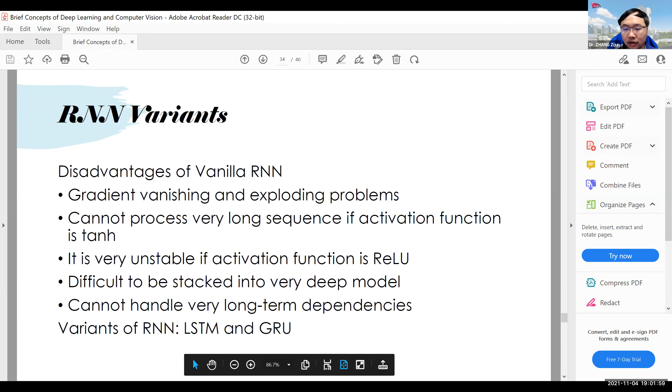I remember last time we probably stopped at transfer learning, right? The introduction to transfer learning. Okay, let's continue on today's lecture. So we were basically finishing this introduction part.

All right, so next let's talk about a very interesting topic, which is transfer learning. This is a technique developed not for improving the development of deep learning models, but it is a technique introduced for addressing the computational burden in developing a deep model for a problem.

So the main motivation of studying such a concept is that people find out every time when we want to utilize a deep neural network to solve a problem or deal with an application, we train the deep neural network from scratch, that means from zero, every time. This is actually troublesome. It's very time consuming and wastes efforts.

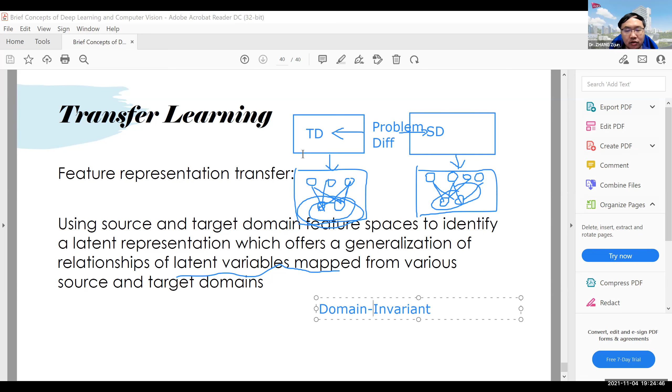Or in another way, assume that you are training deep networks for different domain problems. But you will have one hidden layer that is domain invariant, which can be utilized across different domains, okay? And such kind of feature representation from the beginning input to the latent features, they are able to be transferred. All right, so this is a very basic idea of doing transfer learning.

So there are different ways of doing transfer learning. We can just do instance-based transfer, meaning we're just fine-tuning the structure of a developed backbone model based on the target dataset. Or we can select some of the architecture from a whole architecture to be transferred, okay, that means it's kind of pruning some of the tree and replacing that kind of tree in other tree model. Remember, when we talk about the tree model, we talk about replacing some of the structure in the tree with some frequently used ones.

And the last one is called feature representation transfer, which means we can develop one latent layer which is domain invariant, okay, and such domain invariant latent features can be utilized as an input to developing further machine learning models for different tasks. So that's transfer learning.

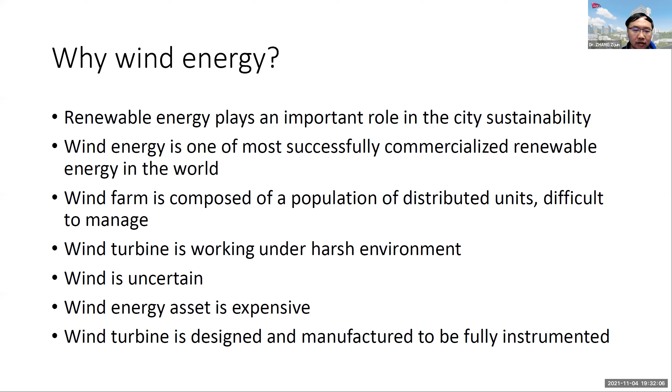It has some very big components like wind turbine blades. This blade could be like 50 meters or even longer, depending on the capacity of the turbine. And the rotor is also very big.

And inside, the big guys include one, the brake to slow down, to introduce torque to slow down the rotation of the wind turbine rotor, and the gearbox.

So what is the function of this gearbox? Why do we need to have a gearbox here? If you look at these big blades and rotor, when wind blows over here, it rotates, but with relatively a lower speed. But this lower speed is generated with a big mass, so it has a lot of energy. So we need to use a low speed gear to drive another smaller but high speed gear.

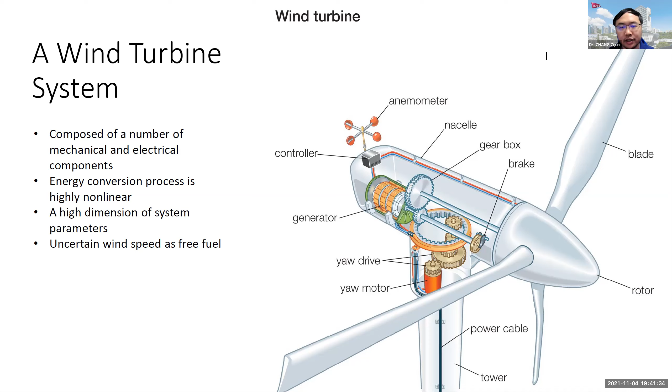To manage such kind of distributed big machines, we cannot just do our traditional practice of management where we visit the area of the machine, check its conditions, and see whether we need to do any maintenance. There will be more than 100 wind turbines in a wind farm, distributed across a very wide, broad area. Even if you drive a car to visit turbines one by one, finishing a whole wind farm would probably take a whole day without any checking.

So what we need to do is install an IoT system to collect data from those distributed systems. This kind of system is called a supervisory control and data acquisition system, or sometimes we call it a SCADA system. This SCADA system was originally designed for monitoring wind turbine conditions.

Meanwhile, it collects a massive volume of wind turbine data. Originally, what people pursued was collecting data of many dimensions and setting some thresholds. If those thresholds are crossed over by some signal, then we receive alarms, and we need to take action to do maintenance or checking.

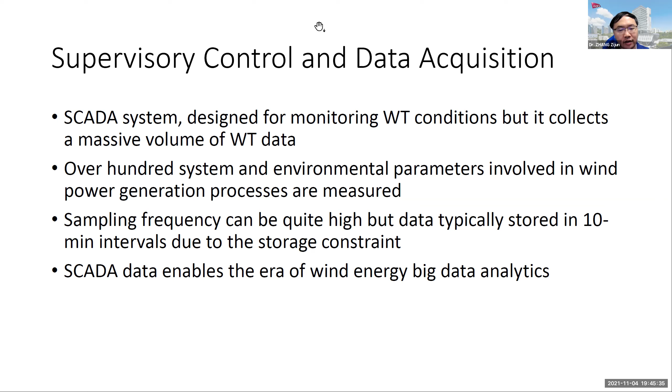And such collected SCADA data actually enables the era of wind energy big data analytics.

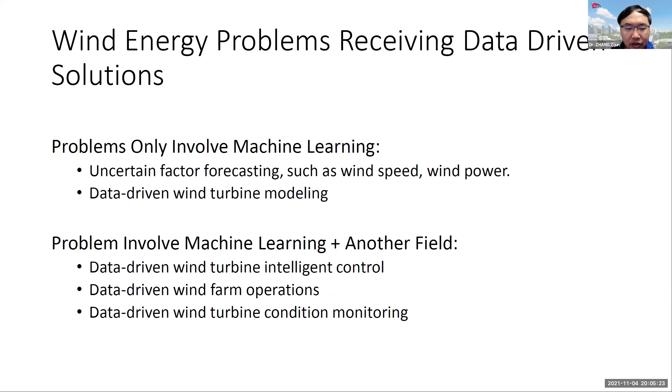Actually, these problems to be solved from the data-driven aspect fall into two groups. The first group is related to problems only involving machine learning techniques, for example uncertain factor forecasting such as wind speed and wind power, and the second is data-driven wind turbine modeling. The second group is a bit beyond so-called machine learning; it's machine learning plus another field technology. For example, machine learning plus control relates to data-driven wind turbine intelligent control, machine learning plus scheduling gives data-driven wind farm operations, and machine learning with condition monitoring techniques gives data-driven wind turbine condition monitoring.

First, let's look at the wind energy machine learning group of problems: the wind speed power prediction problem, as well as the wind turbine system model.

So a data-driven modeling process should actually consider physics-based and mechanical principles. It is needed that we incorporate domain knowledge into further studying the data-driven modeling. At least from domain knowledge, we will know which factors related to such a process should be considered as inputs, and which are the outputs generated by the process.

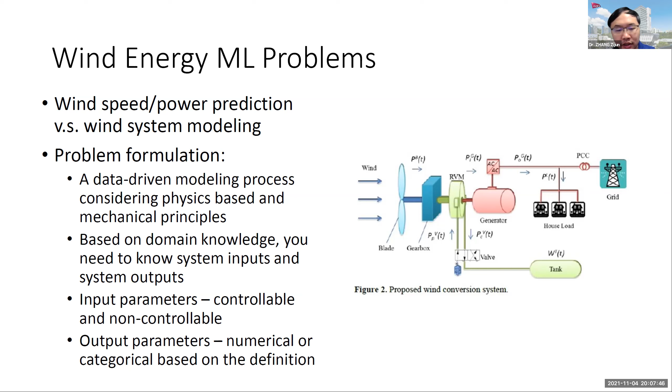And the output parameters can be numerical or categorical based on the definition of the problem you'd like to consider. So we can bring our earlier system engineering idea here for studying the wind energy machine learning problem.

Basically, the first step is we need to rely on domain knowledge to identify the X and Y we would like to use—who will be regarded as inputs and who are the system outputs. Then we map the relationship, learning the mapping between the inputs and outputs, which approximates the true system dynamics. So X and Y are known as data, while the function needs to be obtained. Given a loss function L, a data-driven system modeling task typically aims at identifying a non-parametric model GA via algorithm A, by minimizing the loss between the estimated Y via GA using X and the true observed Y.

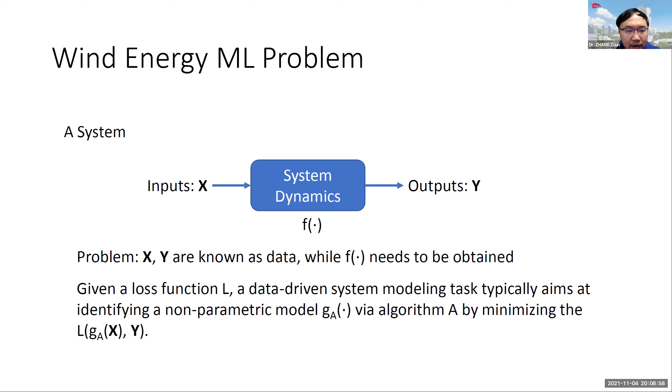So two types of problems can be generalized under the same computational framework, including prediction and modeling. The differences typically include the considered input parameters and the output parameters.

In the modeling problem, we're actually doing estimation of the power output YT based on the system condition and control parameters applied at time t, which are the input, described as X. And in prediction, we're using the inputs observed at t to forecast the future power output, which is yt plus n, where n is larger than or equal to 1.

So overall, the learning process can be the same, which is just to find the function correctly describing the relationship between x and y based on data.

One early and very milestone work in wind speed and power prediction studies using a data-driven approach was published by these three authors. They proposed a very flexible data-driven approach, which breaks away from the classical time series constraints, like the autoregressive model, where you have to formulate them as a very rigorous and parametric mathematical form.

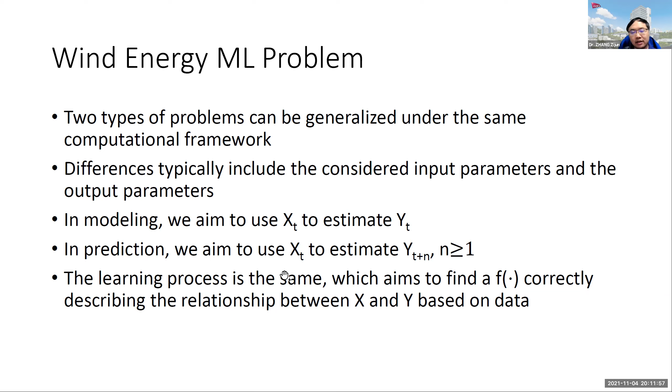One thing I'd like to supplement is that this X in prediction might not always refer to some controllable or non-controllable variables. It can also refer to the historical states of Y itself. It can integrate the time series into it as the input, or just use the time series as the input too.

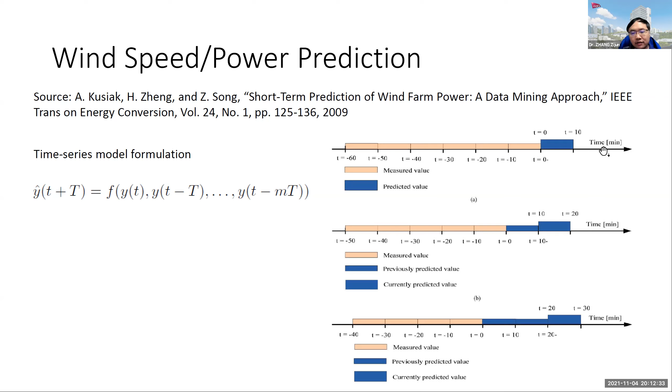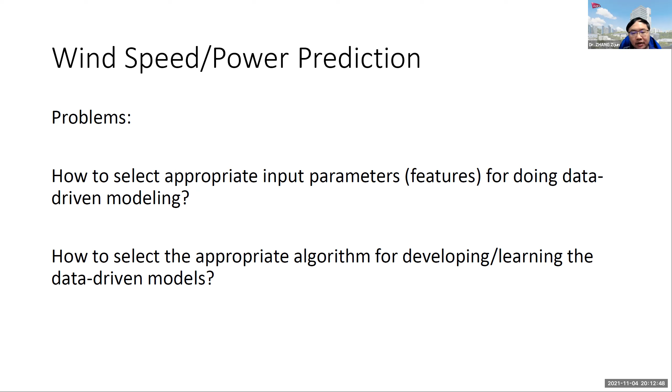So the problem is, in this kind of problem, how to select appropriate input parameters for doing data-driven modeling. For example, the features — based on one signal, we have a long history of records. What historical states do we need to select? What historical states have a big impact on its future value? We don't know, so we have to do data mining to discover that. So how to select the appropriate input parameters, and how to select the appropriate algorithm for developing and learning the data-driven models.

To address the first problem, we already know we can use some feature selection strategy. We've talked about different ways of doing feature selection. One is based on domain knowledge or principles. For example, we can study aerodynamics models for wind turbines, and then we'll know the key parameters in the aerodynamics that will affect the output or target variable, which is the wind power output.

Or we can heuristically or exhaustively trial and error process, meaning given a set of features, we iteratively incorporate those features as the input to do the regression. Then we evaluate the contribution of this input to the improvement of the regression performance to decide whether we need to retain it or exclude it.

Or we can use some linear models with feature selection capability, for example Lasso, which is able to generate a set of significant parameters from the linear relationship aspect. And if you have a special concern about nonlinearity or nonlinear relationships between the input and output, we can also use some analytical strategy based on certain models. For example, we can use the boosting tree, which offers a kind of importance rank of the parameters. Or, based on neural networks, we can do global sensitivity analysis to decide the important parameters.

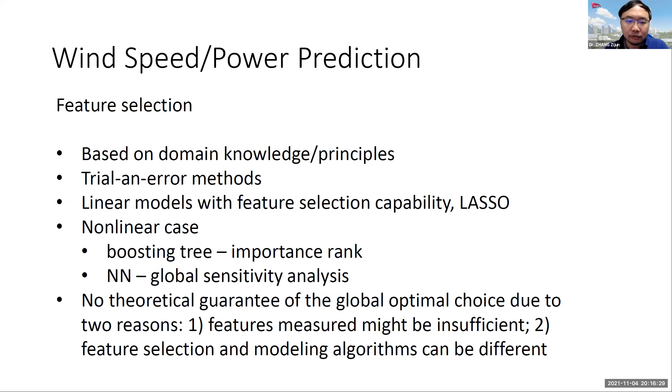After we have selected those features, we need to determine the algorithms for doing data-driven modeling. How can we do the algorithm selection? For example, we have neural network, support vector regressor, regression trees, and regression splines. Which one should we choose? So a pool of candidate algorithms needs to be determined. This is the first thing: you need to determine who will be considered in such selection, or who are the suitable algorithms for doing such kind of task.

If it is a regression problem, you will probably consider some of the algorithms which have been most widely utilized in different applications. Then you conduct computational experiments for comparative analytics, comparing them to see which one is better.

Such comparison needs to rely on some assessment metrics, such as MAE, MSE, MAPE. Let me explain the abbreviations. MAE means mean absolute error. MSE means mean square error. MAPE typically means mean absolute percentage error, or sometimes people use another word called relative error. And as well as the standard deviation of those errors, like standard deviation of absolute error, standard deviation of square error, and standard deviation of absolute percentage error.

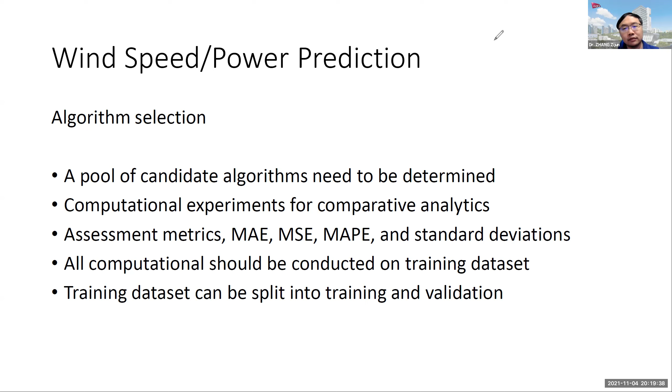So next, the whole regression or prediction idea can actually be more inspiring, beyond just a kind of prediction. For example, what we can do: first we have the current and measured wind speed, or past or predicted wind speed. We can do a prediction of the wind speed time series first, a time series prediction model of wind speed, then get the predicted future wind speed. But this wind speed is not equivalent to power yet.

Then what we can do is, in the data set, we have observed a large volume of wind speed and its associated wind power. What will be interesting is we can apply K nearest neighbor to do what? We can apply the K nearest neighbor of the predicted wind speed and take the average of wind power of those nearest neighbors as the forecast.

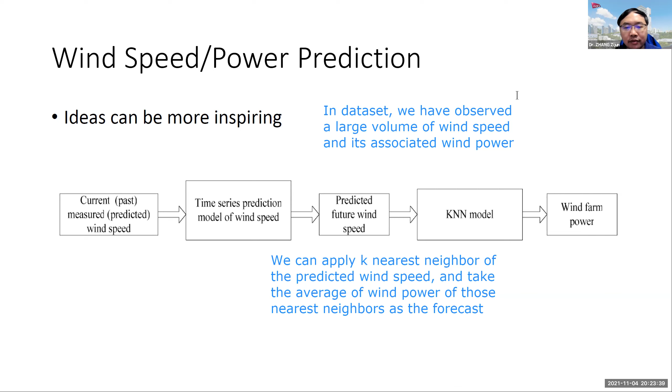I would like to introduce this story to say please don't bound or limit our mindset by the very standard classical data analytics process, for example data preprocessing, feature selection, and then just do the modeling. There are some other very creative ways of doing data analytics, but what you need to understand is you need to have a deeper understanding of the principle of the algorithms.

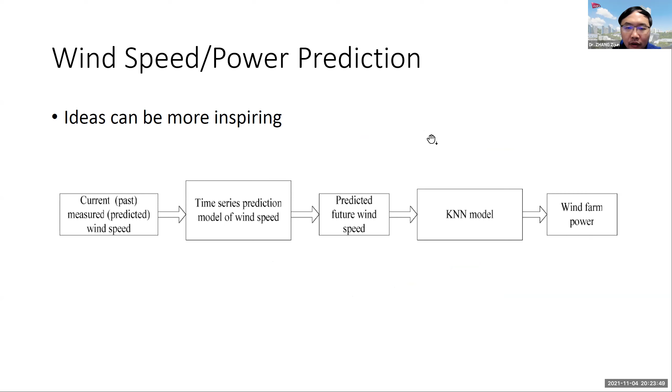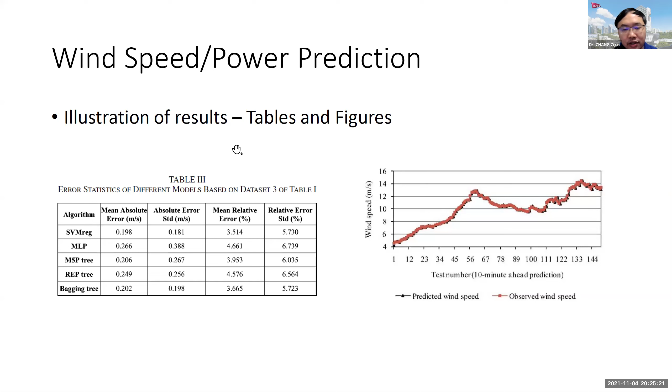So to determine which one is more suitable, we will first look at the magnitude of the errors. The lowest one will be preferred. Here, probably support vector machine regression will be considered a good one for doing time series analysis. The second consideration is the stability of the error, so we measure its standard deviation. A low standard deviation indicates the error changes are more stable.

So previously we talked about the KNN-based integrated prediction model. For new data coming in, we need to divide the data into X and Y, and compute the distance of the new data to the past records of the whole dataset based on X. This distance is utilized to find out nearest neighbors. Then we identify the number of nearest neighbors, or number of nearest historical records close to X, and average their prediction of Y's. So this is basically the mechanism of KNN. But the disadvantage is its online implementation is a little tricky if your dataset has many data points, because the search process will be very time consuming.

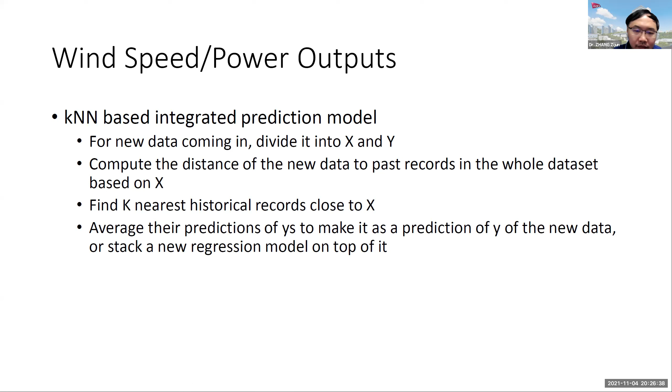So time series models only consider past records of the same parameters. For example, the inputs will just be the historical records of the target Y in that paper. But for the power generation process, besides its past records, or from physics aspects we call the system dynamics, the other exogenous inputs like the controllable parameters, the control settings you have applied, as well as some external conditions, might also contribute to the future states of these target variables. We can extend this by incorporating them, but be reminded that if you want to do modeling, the values of those parameters should also be historical. For example, if you want to predict Y at t, all the others must be observed at t-1 or even further in the past.

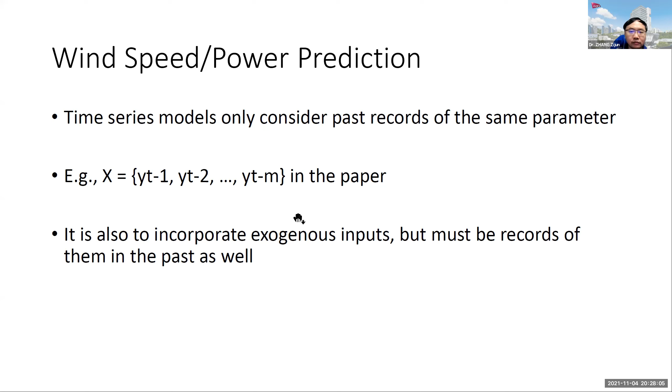All right, so we have finished part 1 of this wind energy application. Next, let's go to part 2.

Part 2, we will talk about the data analytics for characterizing the wind variations, or characterizing some properties of some parameters. Characterization of some parameters is of importance to the wind industry, like for example variation of the wind speed. This is very important because it has a number of following benefits.

First, designers can use the results of such characterization to optimize the design of the wind turbine systems, for example the design for minimizing the energy generation cost. Or wind farm designers can use such characterization results to determine the potential location of wind farms and the locations for putting down wind turbines. Moreover, energy asset investors can use such characterization to estimate the income from the electricity generation of that energy asset.

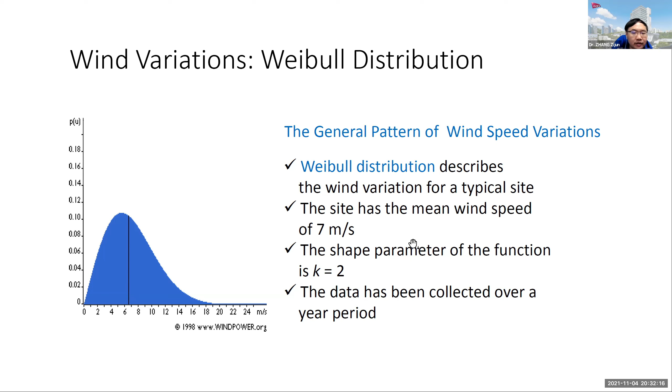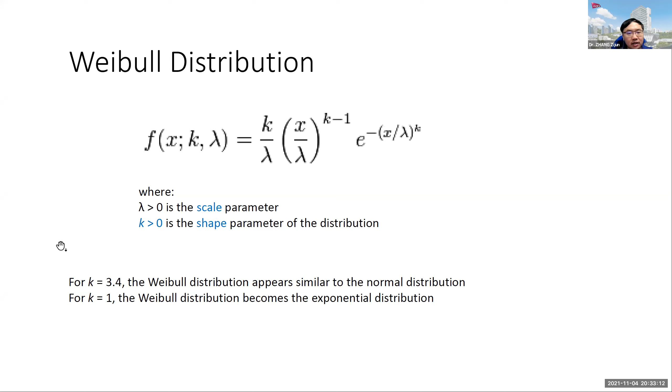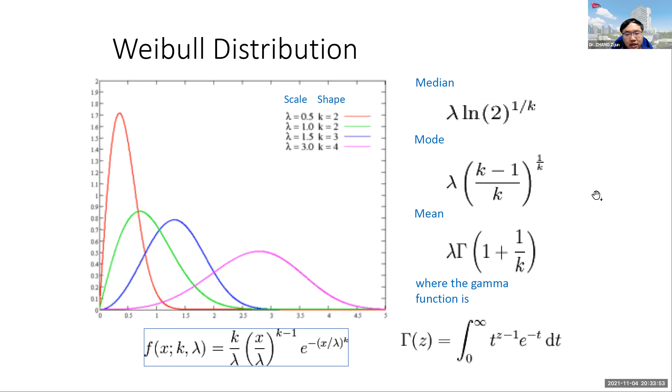So some description of wind speed based on such kind of Weibull distribution. First, the area under the PDF curve is always exactly 1. This blue area, its whole sum is 1, which indicates the probability that wind is blowing at some wind speed, including 0, is 100%. So this distribution can include all kinds of possibility of wind speed.

The median here is 6.6 meters per second. It means half of the blue area is to the left, so 50% of the time the wind speed is less than 6.6 meters per second, and the other 50% of the time the wind speed is greater than 6.6 meters per second.

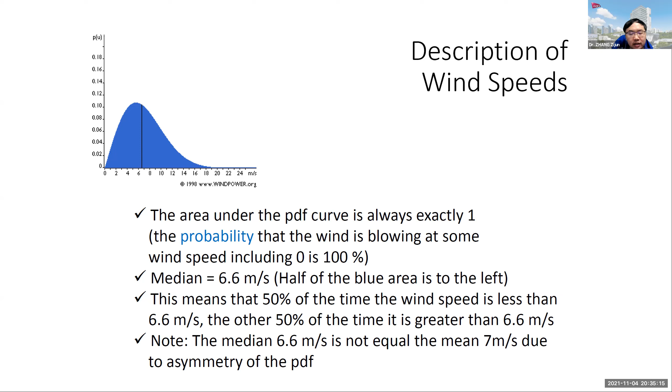What we want to know is that the median is not equal to the mean. The median is the median, the mean is the mean - the statistical way of getting that value is different. And the mode, the highest place, is actually pointing to 5.5 meters per second, which is the most frequently observed wind speed.

The statistical distribution of wind speed depends on the location, the climate conditions, the landscape, and surface. So although we have the statistical distribution records, from the natural conditions and physics aspects, we know that the location, climate conditions, and landscape and surface all contribute to such kind of distribution of wind speed.

So the Weibull distribution may thus vary in its shape, determined by the PDF parameters. If you change the location, or change the climate condition, or change the landscape and its surface, you have to re-estimate the Weibull distribution by re-estimating lambda and k.

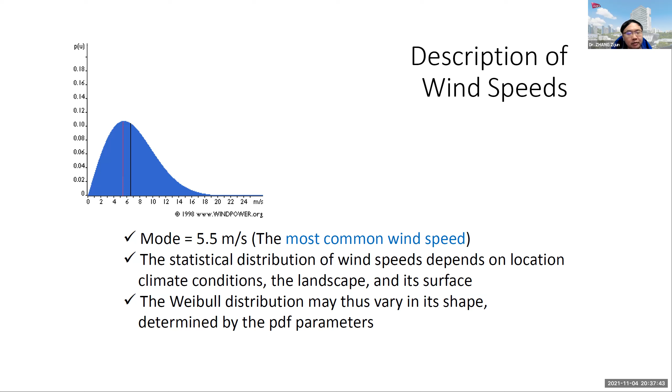So if we extend from the wind speed to the energy scale, we have to touch this average bottle fallacy. From wind to energy, it's V cubic, so its shape will be like this. The average energy content of the wind at the turbine site cannot be determined from the average wind speed. Rather, the Weibull distribution is needed.

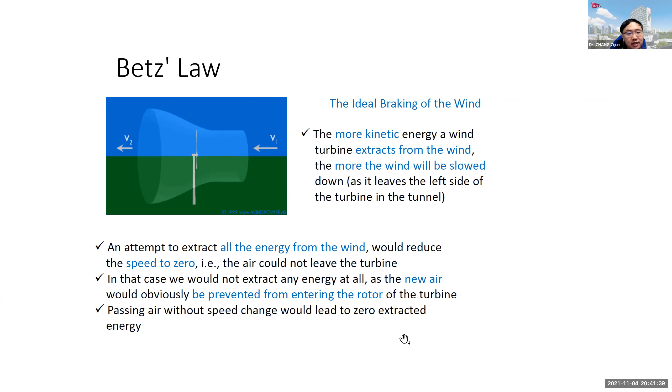So the optimal point is an ideal wind turbine slows down the wind by two-thirds of its original wind speed. That means make V2 equal to one-third of V1.

So Betz's law, presented in 1919, says that one can only convert not more than 16/27, or about 59%, of the kinetic energy in the wind to mechanical energy using a wind turbine. This is presented by Albert Betz, a German physicist.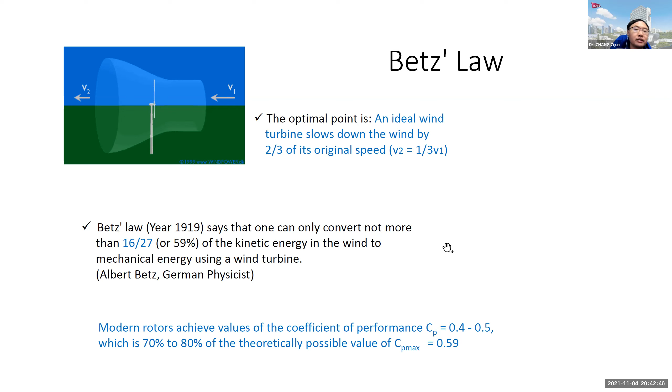The modern rotors achieve a value of the coefficient of performance which is equal to 0.4 to 0.5. This is pretty high already, which is already 70 to 80% of the theoretically possible value, which is 0.59.

And there's a drawback of Betz's law if you look at this figure. So this green line is Betz's law we have drawn. If we want to operate a turbine by maximizing its performance to achieve the boundary Betz's law presented, there's a problem. First, Betz's law approaches a rated wind power too early, and this part is too theoretical, too ideal.

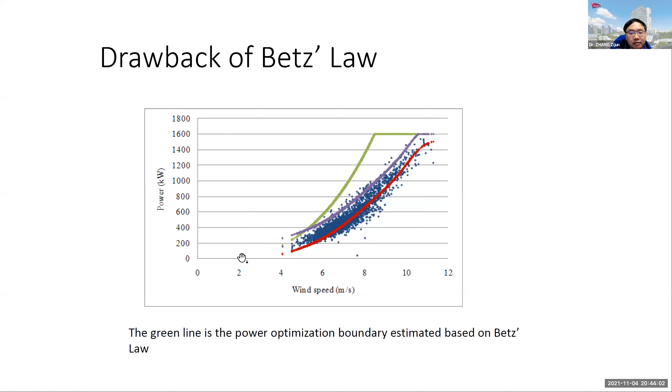But in the left tail part, in a low wind speed condition, Betz's law actually crosses over the cut-in wind speed, so it becomes slower. So there's a crossover point where the theoretical control needs to rely on another bound, as the dynamics have changed. So this is some of the discovery of the insufficiency of Betz's law based on data analytics.

And there should be another converted coefficient here if the power is converted from the kinetic to the next stage. But this one is the pure power content, or the kinetic energy content in the wind, so we don't multiply any conversion coefficient here.

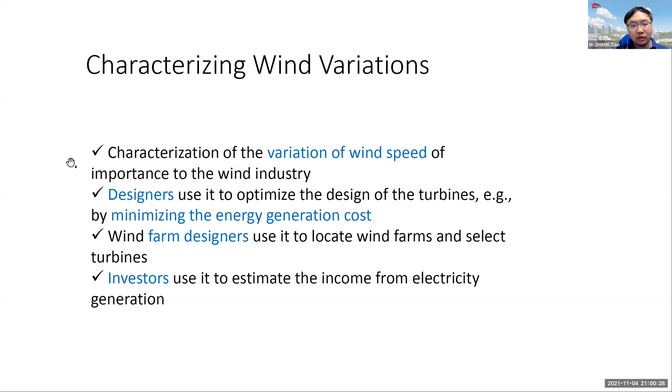Right, so we are now staying at the description of the power density function from the physics side. We will start from this point and see how physics talks about modeling the wind power generation process. And next, what is the shortcoming of the physics-based approach, and what will be the advantage of the data-driven approach.

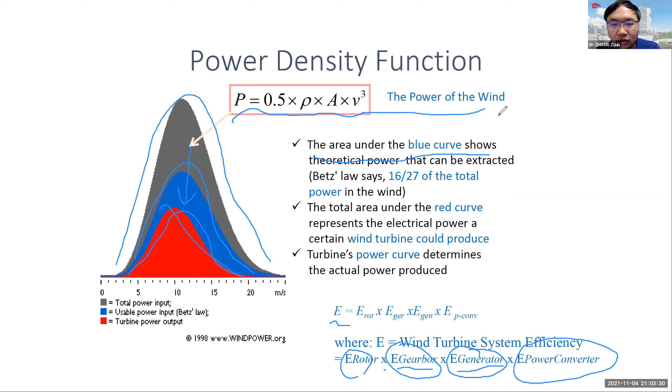And the next one is the mechanical power converted to electrical power via the generator. But is that the final output that the power can be supplied to the grid? No. The last step is the power converter. As I said, renewable energy systems actually output DC. They need a converter to convert DC to AC to fit into the power grid. So there will be a last stage of power loss, efficiency loss.

So we know from the physics or from the domain background, the whole energy conversion process. Now we talk about the wind turbine modeling, first from the physics aspect.

Wind turbine modeling majorly talks about modeling the wind power conversion process. There have been a number of ways for modeling such a process, including computational fluid dynamics, or more specifically, aerodynamics. This kind of study is done more from the design stage, more simulation-like, to roughly estimate the extreme capability of a turbine.

The second is the power curve model. It describes a binary relationship between wind speed and power. It is an extremely simple model to estimate the power output, and it's the easiest to compute.

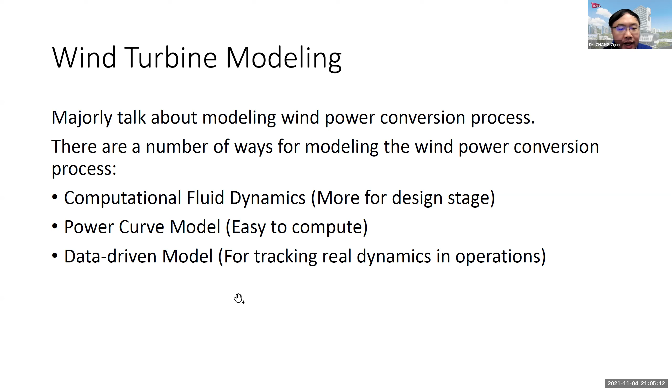The third one is called the data-driven model. It approximates the true aerodynamics from the data. We know that the physics model has a lot of assumptions, so the true dynamics may not be described as in its mathematical formulation. But based on the data collected, we are able to track the real dynamics in operation.

So first, let's look at the computational fluid dynamics model. It is a subset of computational fluid dynamics, which is the aerodynamics model, utilized to describe this wind energy conversion process.

This formula describes how the kinetic energy in the wind converts to wind power. It involves a number of terms. First, 1/2, which is a constant, and rho, which describes the air density.

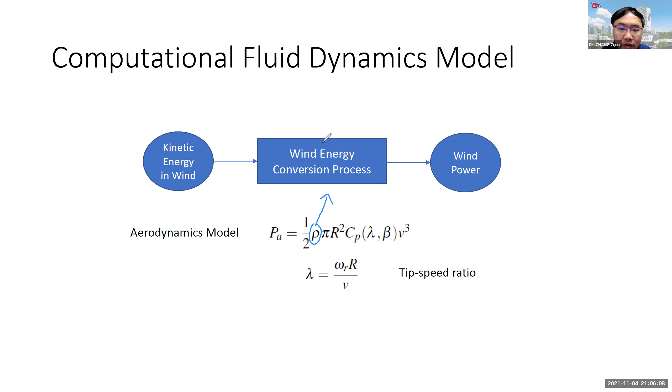I guess the next slides probably have the individual terms. So P is the mechanical power produced by the rotor. 1/2 is a constant, and rho is the air density. The capital A is the rotor swept area, and Cp is the power coefficient.

Its input is lambda, which is the tip speed ratio, and V is the wind speed. This tip speed ratio is equal to the rotor radius multiplied by the rotor speed, divided by the wind speed.

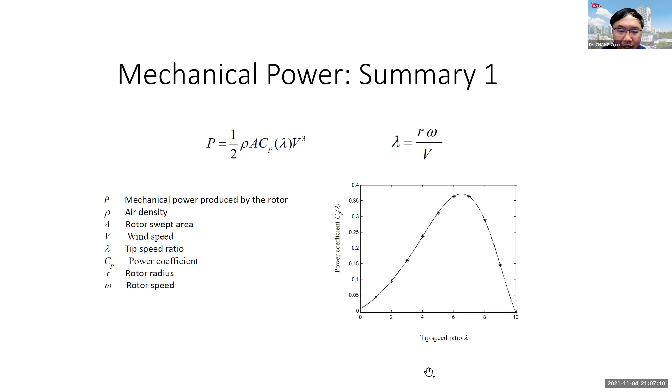Based on different levels of wind speed supplied by nature, we need to determine the best rotor speed to obtain the maximum rotor power. And this is where the nonlinearity comes from—it's highly nonlinear.

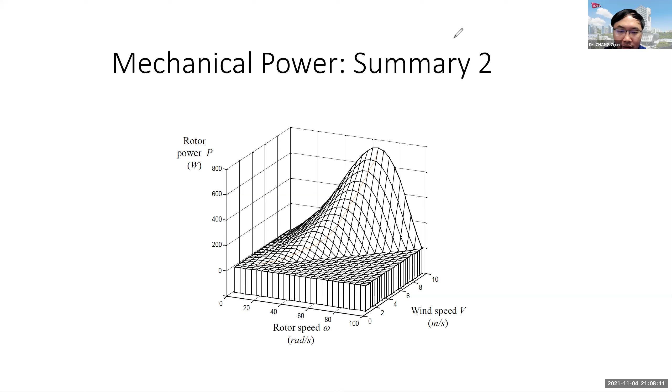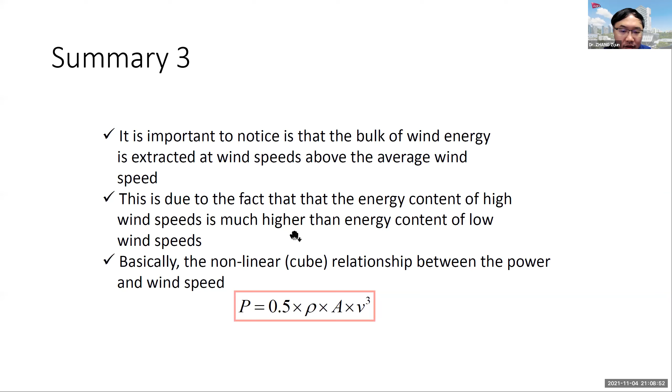It's important to notice that the bulk of wind energy is extracted at wind speeds above the average wind speed. This is due to the fact that the energy content of high wind speed is much higher than the energy content of low wind speed—basically a nonlinear, cube relationship between power and wind speed.

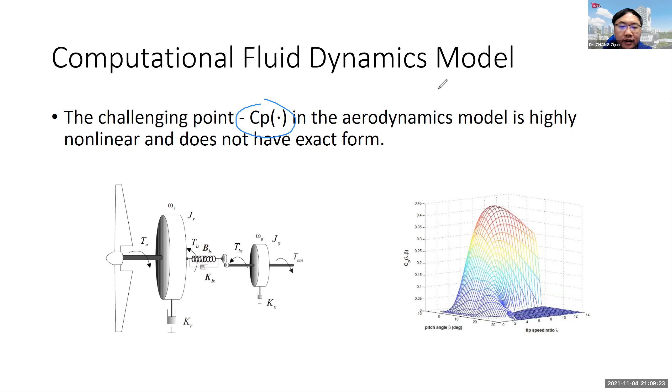So we find that in the computational fluid dynamics model, there's one term which is implicit, which is Cp, the power coefficient. It does not have an explicit mathematical formulation—it is highly nonlinear and does not have an exact form. So naturally, it needs to be fitted from data, it needs to be estimated.

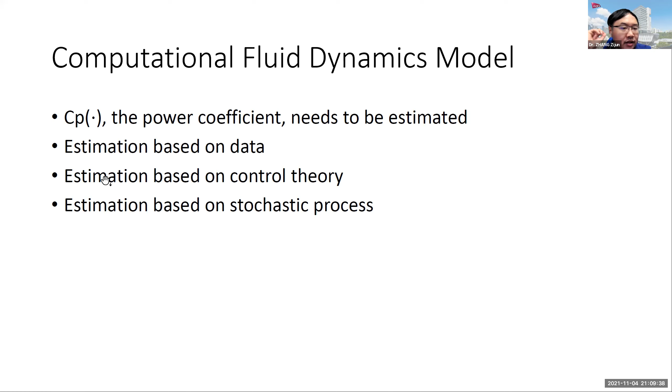Such estimation can be done based on data, based on control theory, and based on stochastic process. We will talk about the way of doing such kind of estimation using data.

There are a number of critical concepts, which is the wind speed term. There will be three wind speed terms. One is VC, which is called cut-in wind speed.

So what does the cut-in wind speed mean? This is simply because if the wind speed is too low, it cannot drive the rotor of the wind turbine to rotate. It needs to be strong enough to overcome the inertia and trigger rotation of the rotor of the wind turbine.

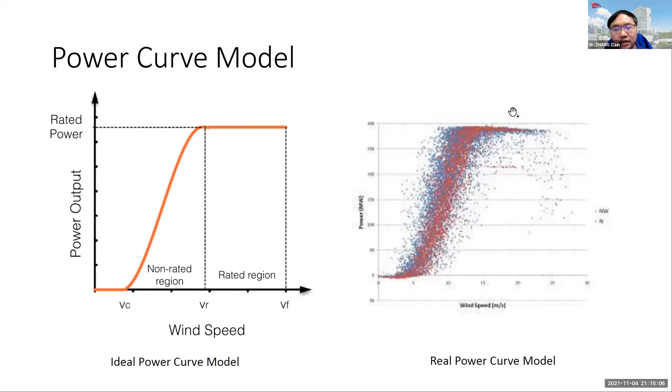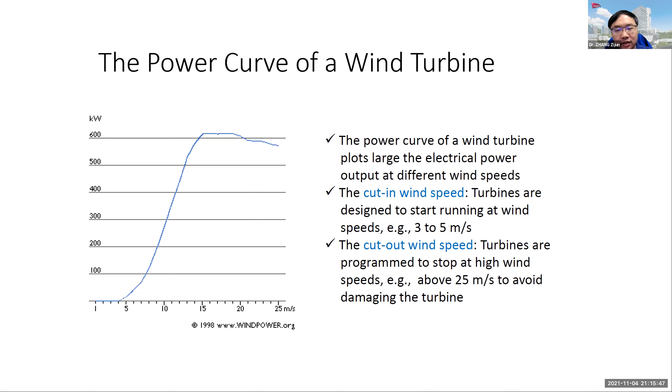So the power curve of a wind turbine plots the electrical power outputs at different wind speeds. We have explained the cut-in wind speed and cut-out wind speed. Most turbines typically set the cut-out wind speed to 25 meters per second. If you operate wind turbines at a wind speed higher than 25 meters per second, it is possible that it rotates too fast, and the nacelle will drop down to the ground from the tower, causing mass imbalance and other issues.

So we have talked about the different wind speed intervals. From 0 to cut-in, this is the area where there's insufficient power to overcome friction and initial torque. Interval B of the wind speed indicates the turbine needs to be optimized to operate by maximizing its efficiency, and this area is usually controlled by controlling the blade pitch angle.

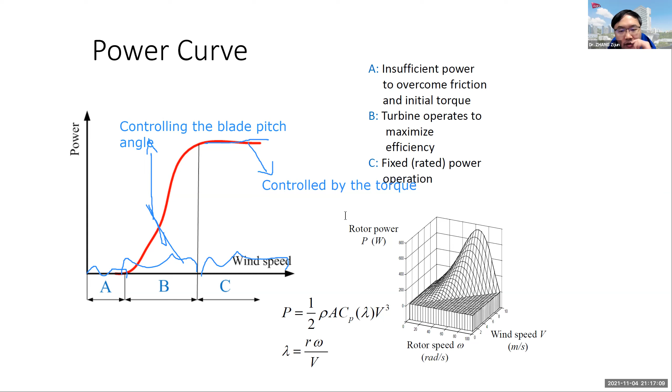And area C, which is a fixed rated power output, also needs to be controlled. It is controlled by the generator torque, to slow down the rotation.

So in plotting the power curves, we know that if the wind speed is not fluctuating too rapidly, one may use the wind speed measurements from the anemometer and read the electrical power output from the wind turbine, and plot the two values in the form of the power curve.

But in practice, the wind speed always fluctuates. It's stochastic, so one cannot measure exactly the column of wind passing, and therefore one will see a swarm of points dispersed around. Furthermore, the actual anemometer error can be 3%, leading to 9% or even 10% higher error of the certified power curves.

And this error amplification is typically led by this cube term.

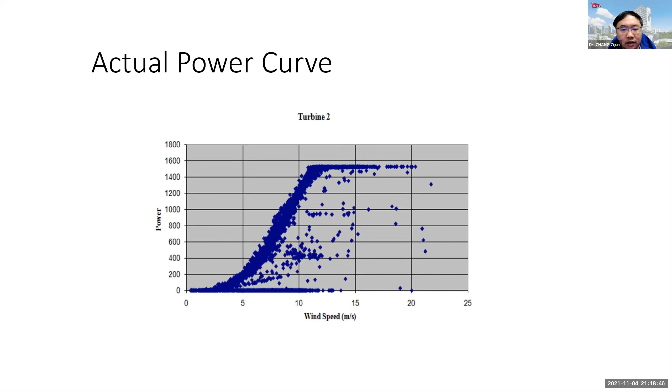So this figure illustrates the actual power curve, and another figure visualizes the real power curve. You can see that there's no certain pattern. It's very dynamic.

So we need to verify the power curves. Power curves are actually constructed using measurements in areas with low turbulence intensity and with the wind coming directly towards the front of the turbine. So the power curve can be utilized to verify whether the turbine is in normal status or not.

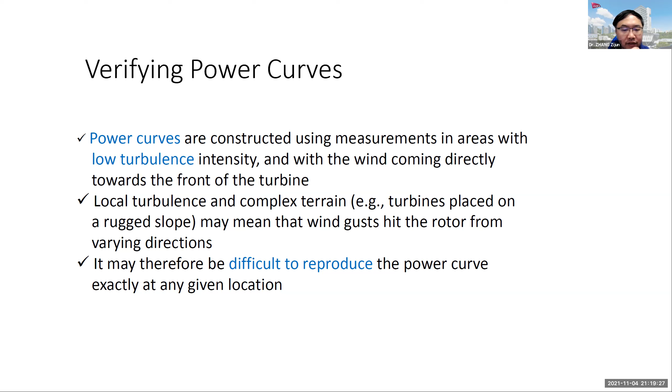So local turbulence and complex terrain may mean that wind gusts hit the rotor from varying directions. It may therefore be difficult to reproduce the power curve exactly at any given location.

Next, let's look at the term power coefficient in the aerodynamics model. So power coefficient actually indicates the turbine efficiency, and such efficiency means the efficiency of generating power. The power coefficient indicates how efficiently a turbine converts wind energy into electricity.

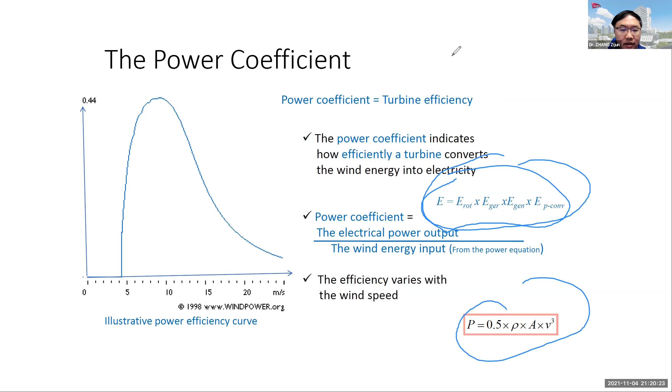The equation we have described in the past. So the power coefficient is equal to the electrical power output divided by the wind energy input. So the wind energy input is like this, and the power coefficient is like that, and the efficiency varies with the wind speed.

So there's an example. If a turbine was designed for max efficiency of 44% at a wind speed of about 9 meters per second, then the efficiency is not as important at low wind speeds, as there's not much energy to harvest. But at high wind speeds, the turbine wastes the excess energy above the cut-out wind speed. So efficiency therefore matters most in the regions of wind speed where most of the energy is to be found.

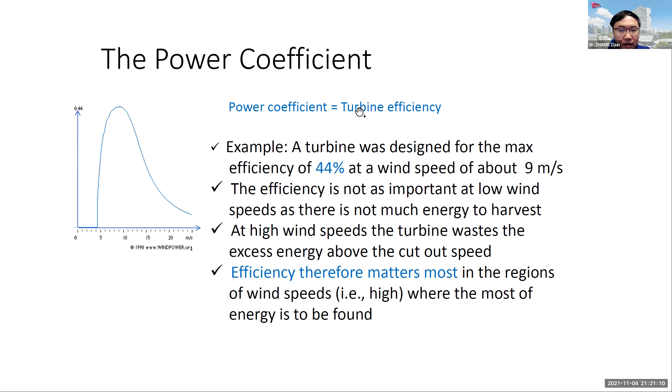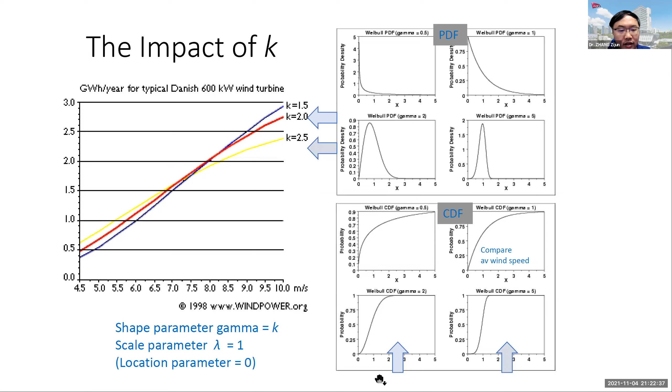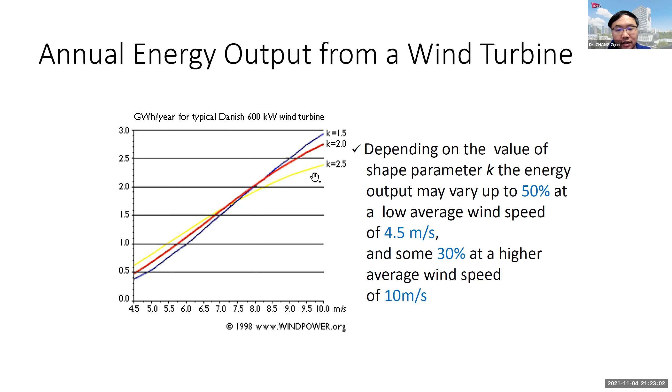So depending on the value of the shape parameter K, the energy output may vary up to 50% at a low average wind speed of 4.5 meters per second based on this figure, and some 30% at a higher average wind speed of 10 meters per second. So the variation can be 30%.

So based on the left figure, we can see that considering the red curve with a shape parameter k equal to 2, normally shown by manufacturers - manufacturers typically consider the Weibull distribution modeling the density of the wind speed with a setting k equal to 2.

And for an average wind speed of 4.5 meters per second, the turbine generates about 0.5 gigawatt hour per year. But for an average wind speed of 9 meters per second, we will reach 2.4 gigawatt hour per year. So that's doubling the average wind, and the energy output increased 4.8 times.

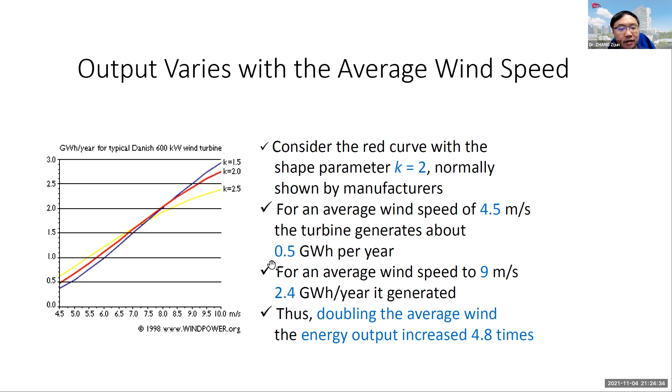Almost five times. So you can see the importance of finding a good location to set up the wind farm project. If you are able to find a location with average wind resources of 9 meters per second per year, your project will be very successful. The lower wind speed doesn't mean a linear decrease of the economic return - it's many times decreased, 5 times decreased.

The output of wind power actually varies with wind speed. For average speeds of 5 and 10 meters per second, energy output will differ by a factor of 4. The reason is that the efficiency of the wind turbine varies with wind speed. Also, the uncertainty that applies to the power curve also applies to these results. The calculations can be refined by considering that in temperate climates, wind tends to be stronger in winter than in summer, and stronger during the daytime than at night.

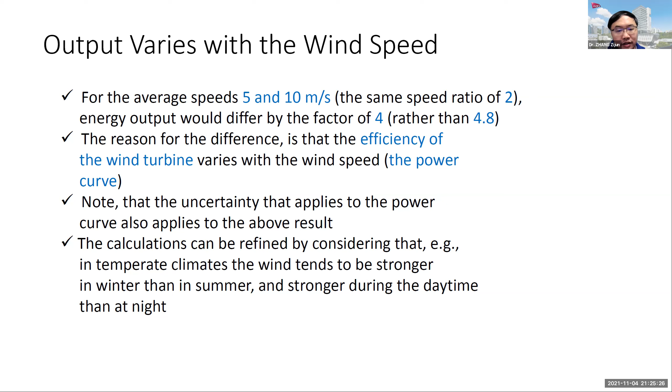There's another very interesting metric we can utilize to evaluate capacity based on the data, called capacity factor, or turbine capacity factor. It is the ratio between the actual annual energy output of the turbine and the theoretical maximum output. The theoretical maximum output is deterministic.

You may assume the turbine can run for a full year without any shutdown, which is 8,766 hours. So for a 600 kW turbine producing 1.5 million kWh per year, its capacity factor will be computed as 8,766 hours per year multiplied by 600 kW, which is the maximum capacity of that turbine. The total amount is like this, and then we can compute the capacity factor as 28.5%.

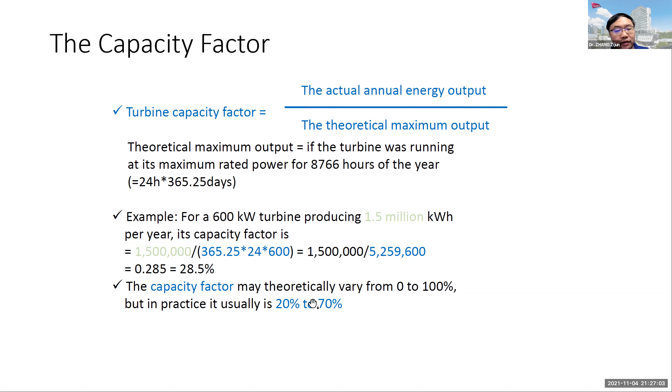So capacity factor may theoretically vary from 0 to 100%, but in practice it usually varies from 20 to 70%.

Another dimension of metric to evaluate the data we collected from a wind farm is called turbine or wind plant availability factor. This availability factor is the ratio between the time the turbine plant is available and the total time. This indicates the gap or duration that the turbines are not operating, and it will, to some extent, reflect the management performance on those distributed machines.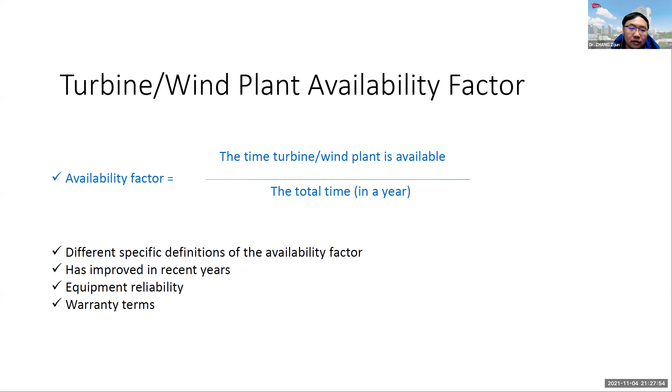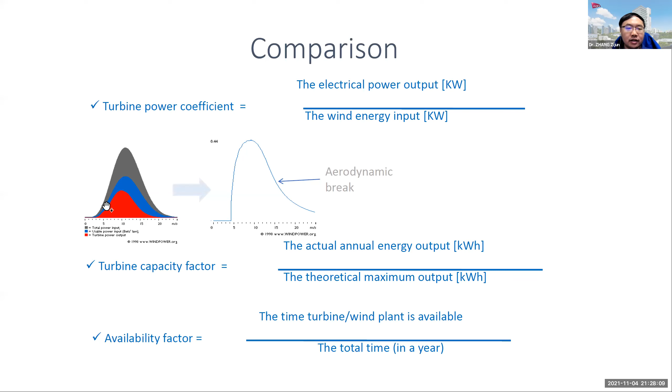So we can compare the three metrics: the turbine power coefficient, turbine capacity factor, and the availability factor, for evaluating wind power generation performance.

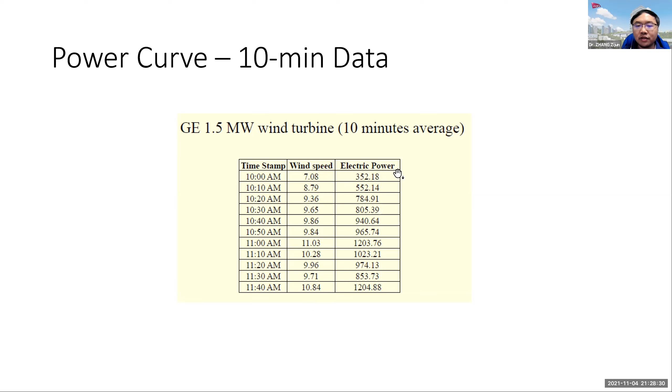Next, let's look at some power curve models based on data-driven aspects. Given the real data we obtained, which has one dimension for wind speed and another for electric power, we can draw the wind power curve by plotting a scatter diagram of that data. But if we plot 10-minute data versus 10-second average data, we can see that the power curve shape changes a little bit.

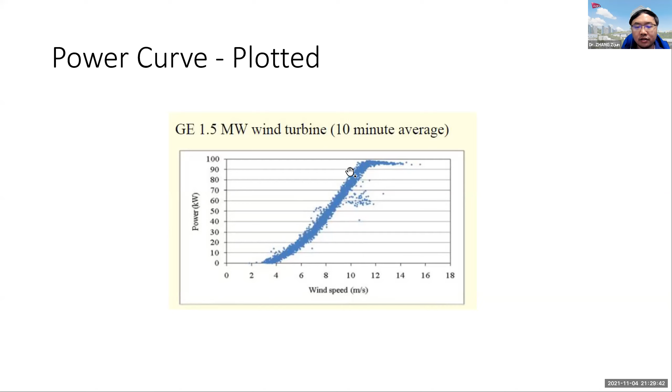In 10-minute data, some of the data points will most likely cluster here, while in other places the data points are pretty scarce. And with 10-second data, you can see they're dispersed even more. This means that averaging actually reduces some of the information. So if we average data points to a longer time scale, a lot of information is lost, especially a lot of variation is lost.

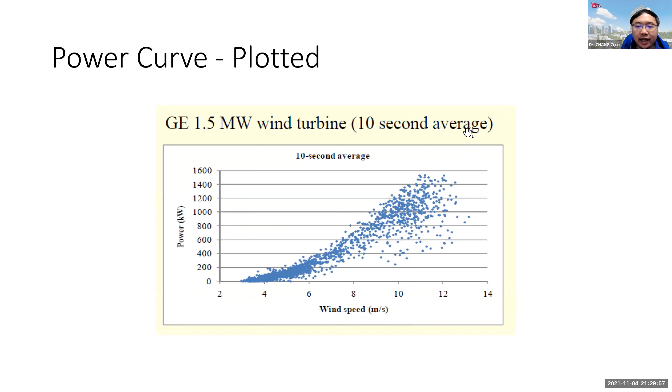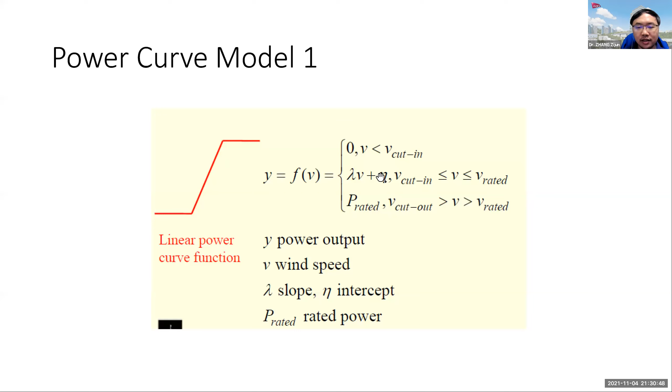So to model the shape of the scatter diagram between wind speed and power, we have a number of choices. First, we can use a linear power curve function to do a linear fitting of this power curve — a stepwise linear function. It has a constraint: if the wind speed is less than cut-in, the power will be 0. If the wind speed is higher than rated but less than cutout, it will be at maximum capacity. But within that range, it will follow a linear curve, lambda multiplying the wind speed plus an intercept, where lambda is the slope.

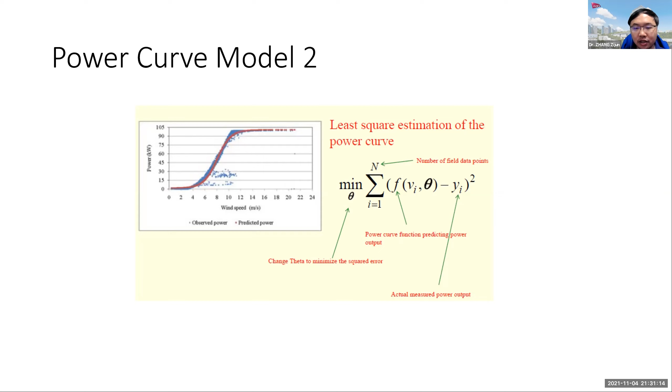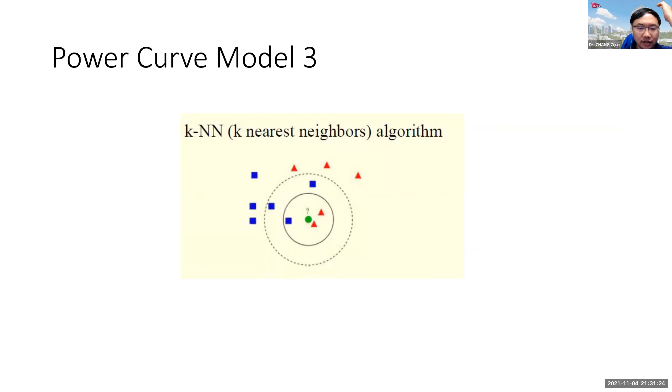We can also do a least squares fit using a more complicated machine learning model, or a non-parametric power curve function, to make a more flexible curvature than the linear stepwise function. The third way is using the k-nearest neighbor algorithm, which searches for the nearest data points among all the data points and computes the average. This gives a curve that is more dynamic and more adaptive to the shape.

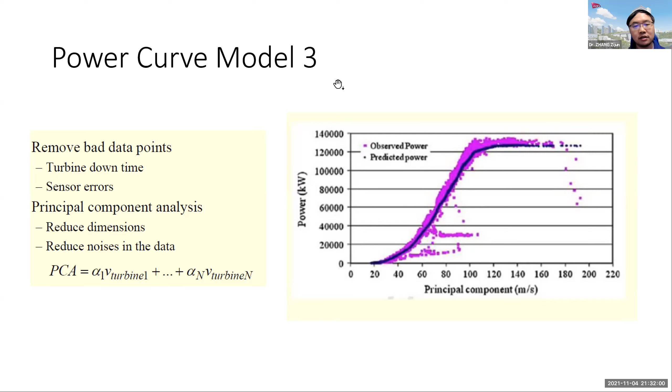All right, so we'll probably stop here today. We will talk about the data-driven model by extending the power curve model next time.